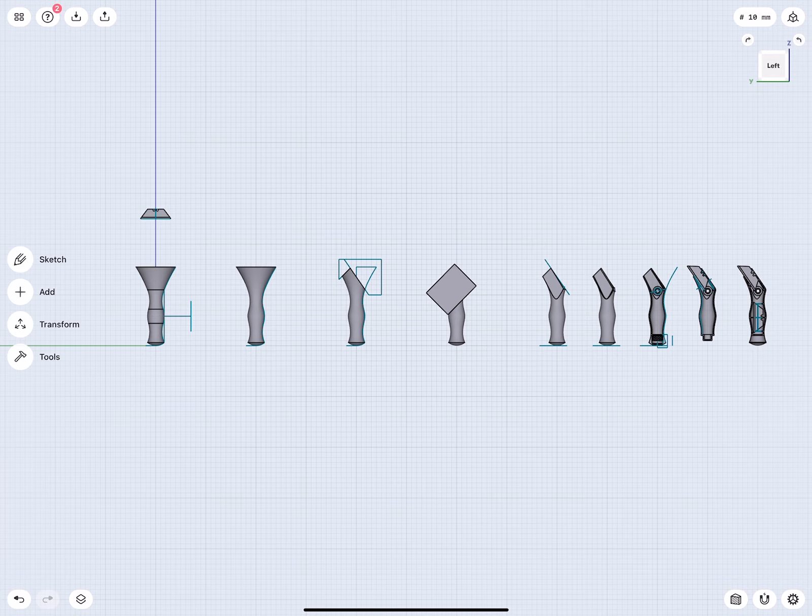In this process lecture, I will show you all the individual steps I took, starting with exploring the initial form and how to sketch it, and then modeling outer and interior details to produce a functional utility knife ready for testing and manufacturing. Please feel free to download the shared file so you can follow this demonstration better and explore the design on your own. Great. Now let's get started.

Very good. So here we are. Let's take a look at what we have. On the left side, you see there are 1, 2, 3, and 4 models. And these are actually representing the initial exploration of the basic form. And then on the right side, we have 5 individual steps.

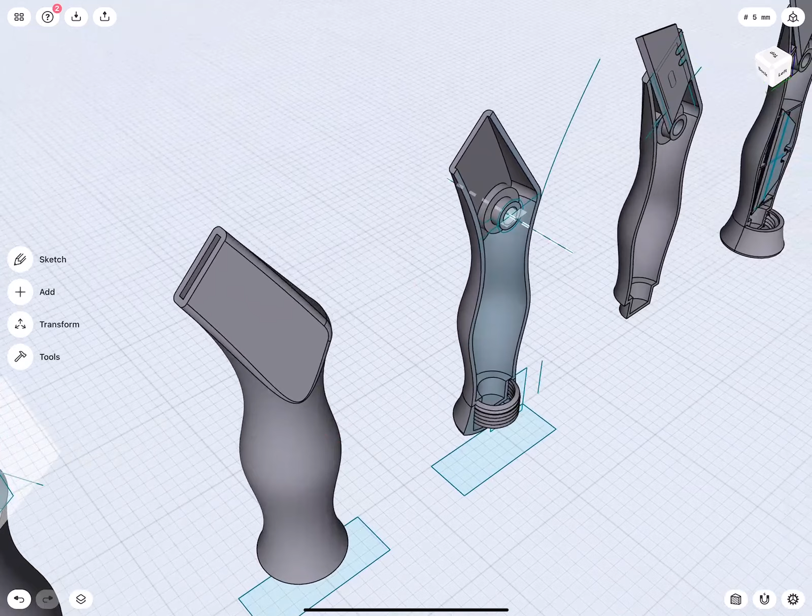For example, there I start shaping the details more, then starting to core it out, add, for example, threading and a hinge. Then I am planning on adding the blade. And then in the end, I will also have all the elements to hold the blade and the blades inside in the handle. So let's take a look at how I started first.

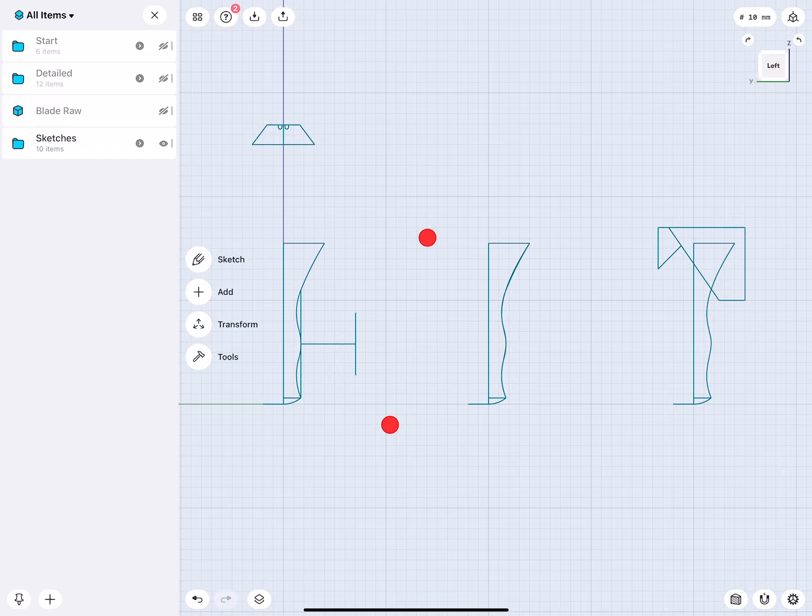The whole design, in addition, is also sorted into the start and the detailed models. There is a blade object, and here inside this folder are all the sketches. So let's turn all this off, and let's take a look at the sketch.

This exercise is based on a very old utility knife. It's metal cast, it's very organic, and it surprisingly works really well. The way it is in your hand is nice and comfortable. You can work with this for a long time without getting fatigue in your hand.

Because it is nice and organic, I assumed, well, we can quickly retrace this out of arcs. So this is what I tried to do here. There you can see I put in all the arcs, but I quickly noticed that while it is possible to create a sketch with this flow, it is also somewhat labor intensive. And I always try to make sketches as simplistic as possible, simply to allow me to work faster and have less work.

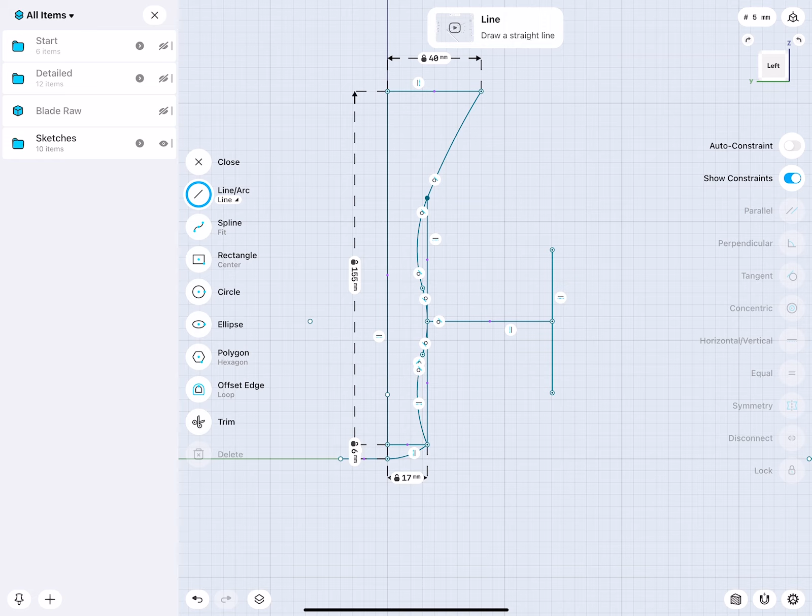What I also noticed based on the sketch, when I created a revolve object, I started to have these edges actually on the surface, which I didn't really want. Plus, because this is an arc, this area was a little bit too, let's say, linear. While it is rounded, it's just not round enough.

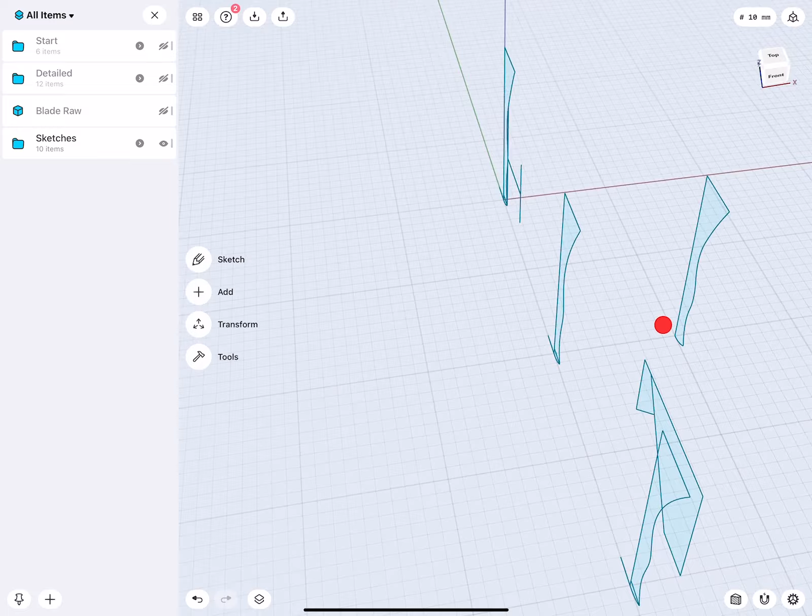So to improve this, what I did, let me go into 3D view. I took the sketch and then made a copy of it and moved it there, into the background. So when I then went back to the left view, I could very easily start tracing over it. So here is a new sketch. 1, 2, 3, 4, 5 points. I'm using the fit point spline.

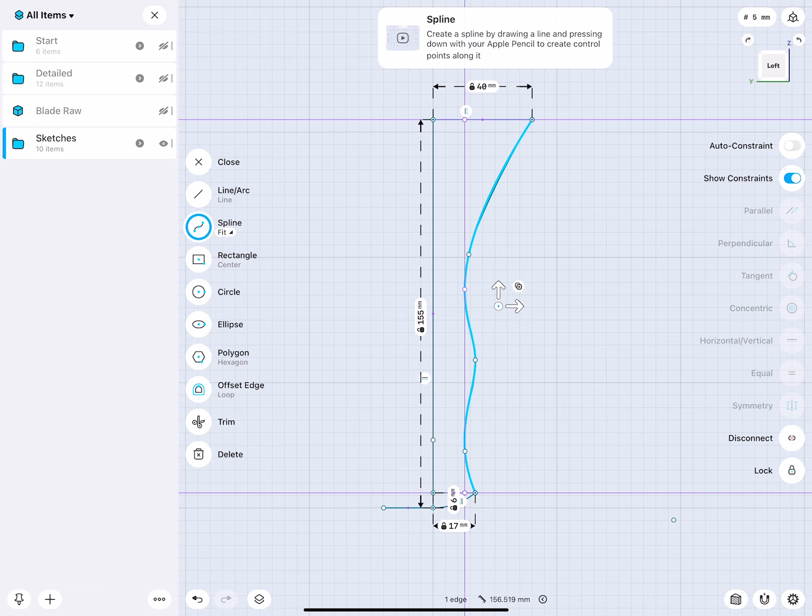The nice thing about the fit point spline is that it creates very smooth and fluid shapes. You can also see here how, for example, the fit point spline is a little bit more bent. Ideally, that is what I wanted. The trick of the fit point spline is we need to figure out where we have to position all these points to get exactly the type of flow we're looking for. But this was only a matter of pulling these points.

And then when we take a look at this shape, which I then revolved, there you can see, compared to the circle one, this is nice and smooth. Okay, so this was kind of like step 1.

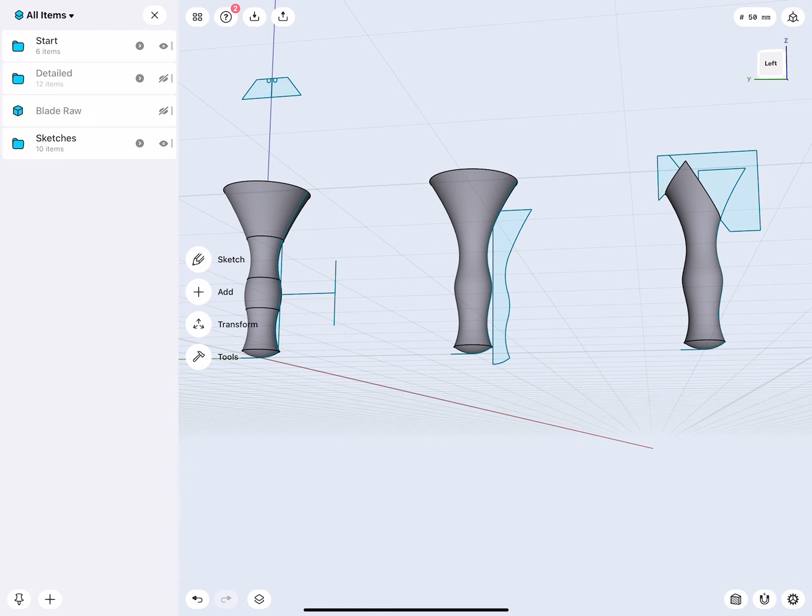This is also a process I very often teach my students in industrial design. When you learn CAD, try to think about how we would do something in a model making shop. So we could take foam and put this on a lathe. And then later we take a knife and start cutting more elements away from it. So that is actually the step that's happening here.

So this is the initial sketch here again. And I drew a line there and added more lines to it, so I could create these 2 or 3 fill areas. And those I used to actually trim everything.

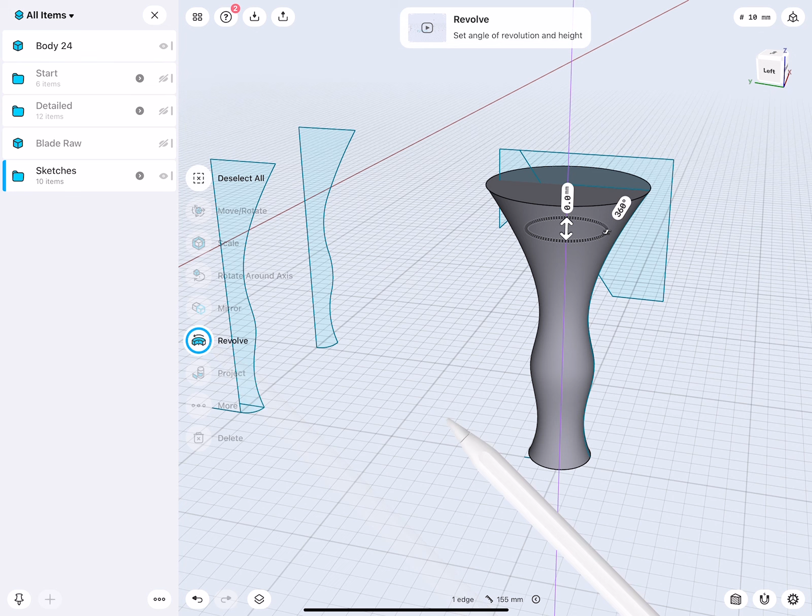So for example, for those who are not familiar with it, I'm just quickly rebuilding this there. And there we are. This is all selected. And then we can cut this away.

Cut this away that way. And then this we delete. And there we are. Super easy, no? Nice. Okay. So this was actually from the side.

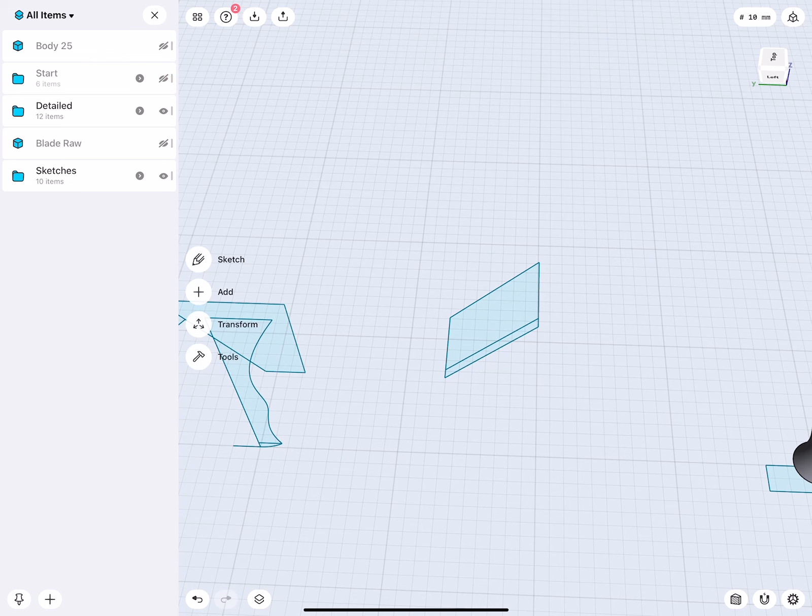But when we take a look at here, you also see that we have these sides being cut. So this is actually not just something that's cut down from the top or strictly from the side. As you can see here, this is a cube where one side, meaning this face, is actually rotated. So how did I do this? Also here, very simple. And also Shapr's direct modeling tools are really fantastic for it.

So I brought this over 200 millimeters. I actually moved all those in 200 millimeter steps. What I show you here is modeled in steps. This is also how I internally work when I explore variations. It's actually just easier to spread something out. And then it's kind of like a manufacturing street where we do particular tasks. So as you saw, I can always make a new copy, bring it to here, and then redo something.

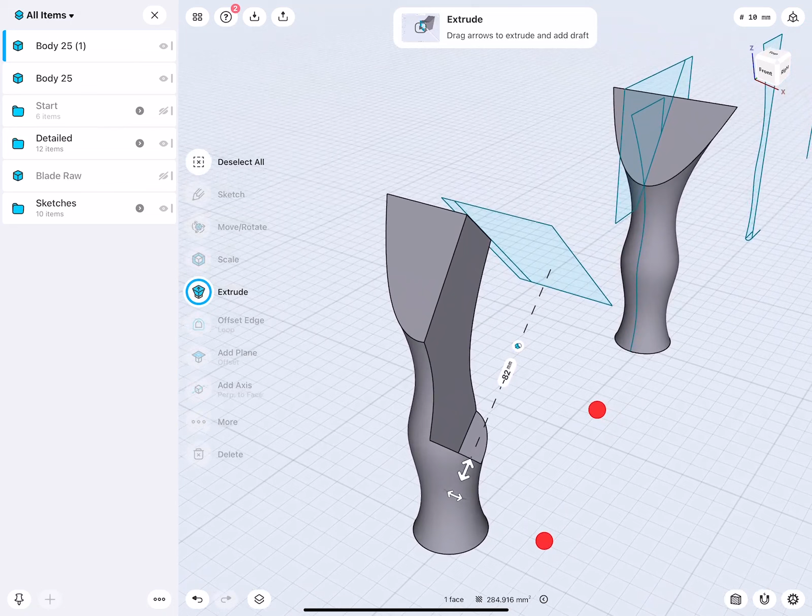So this shape, I actually extrude a little bit, and you see how it cuts into the body there. That's not good. Let's make a new body. Now, this face is the problem. We have to rotate it, and this is super easy. So select the face, then the widget we move to there, and let's rotate it.

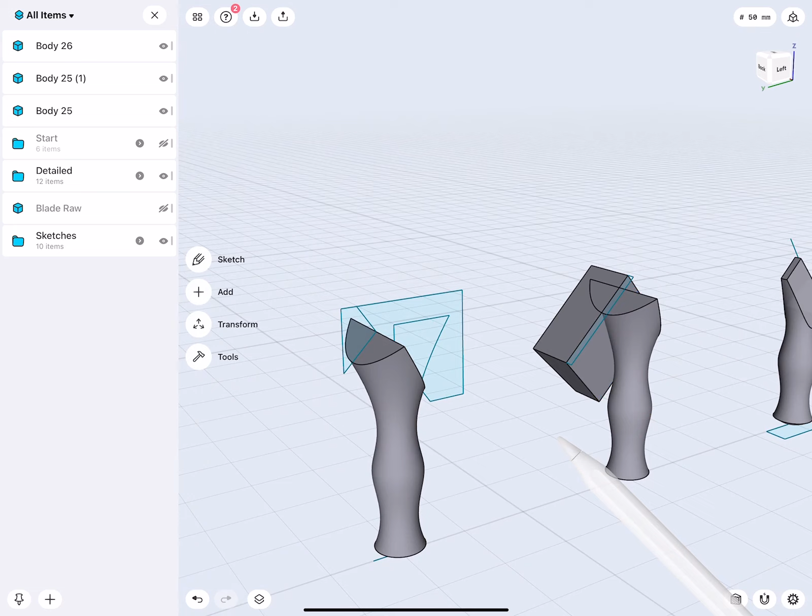Now what we need to pay attention to is how well this actually intersects. Is this good? 13, 11. Yeah, this is good. Very nice. So one part is done. I can make a copy by simply mirroring this over. I use here a sketch. And there we are. And then from this, these two I will subtract. Very good. And there. See, super easy.

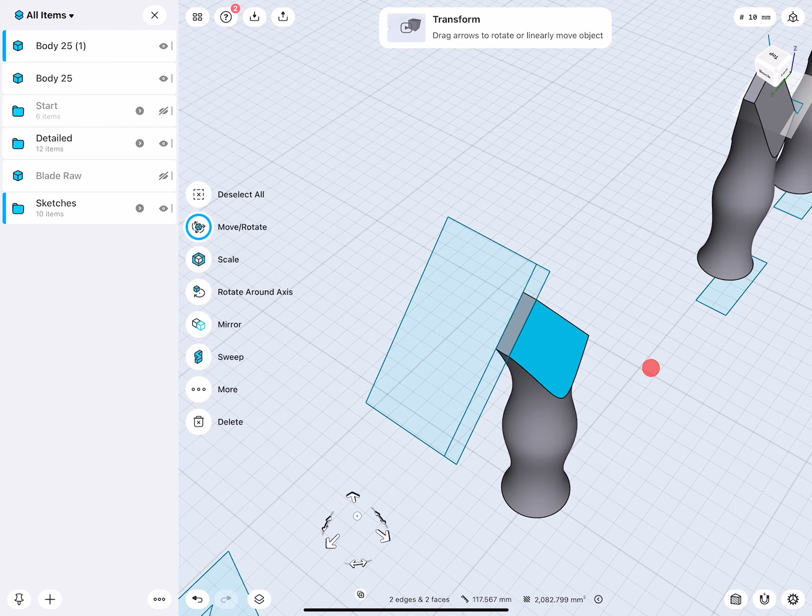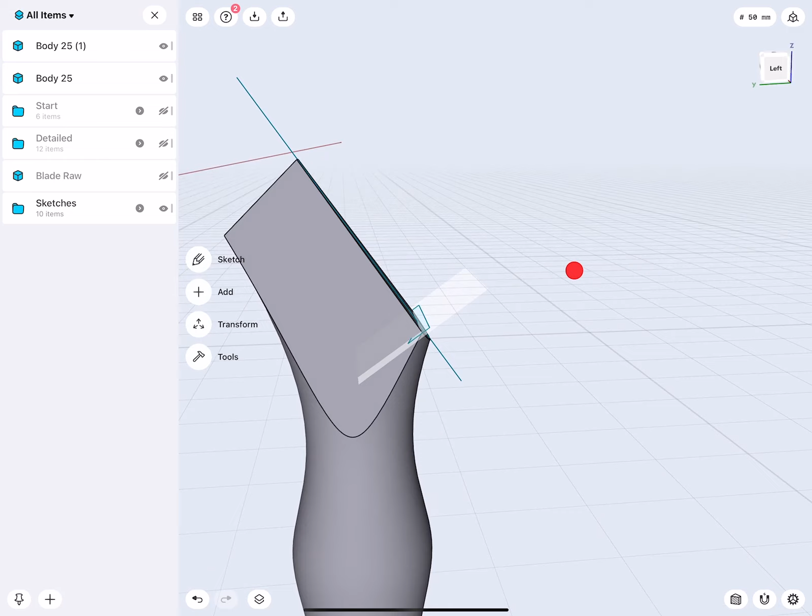Okay. So based on how I sculpted this object and based on how these lines are drawn, I can then create all these angled faces. Very good. Everything is nice and round, and the top surface here I would like to be round too. So the way I did that was that this I brought over. And you can see here there is a line. The line is actually a copy of the sketch.

I brought this one over, and directly onto this line I would like to add a sketch that is kind of running along, so perpendicular to it, and use a construction plane. So we don't want to just draw a sketch and then simply try to rotate it into position. We do it differently. So we go to add construction plane. And then here we have various options: through edge, at an angle, perpendicular to curve, perpendicular to edge.

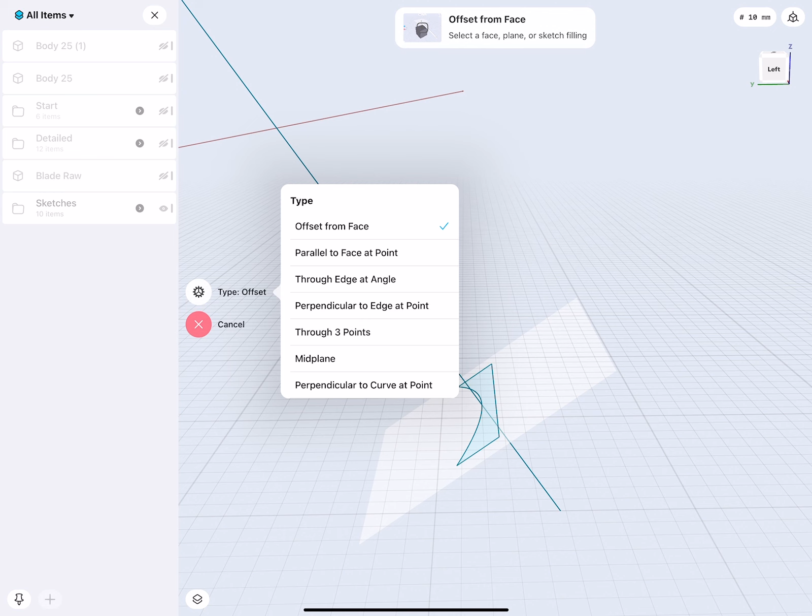There. And then we can drag this to where we want. And you see how this is actually at an angle. When I select this plane with a finger double tap, and then quickly draw something, we can see how this is now perpendicular to this line. So that is the way I created this. Very good.

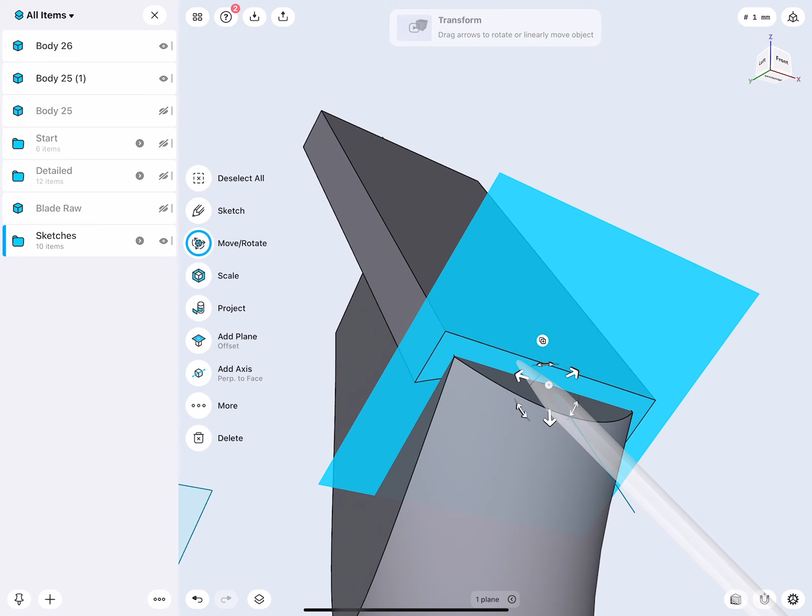So this shape, then I can make this new, and might have to hide this, push this back. And this arc is now going to give a shape to the top part. So from this, I would like to remove this. And there we are. Super nice. Okay.

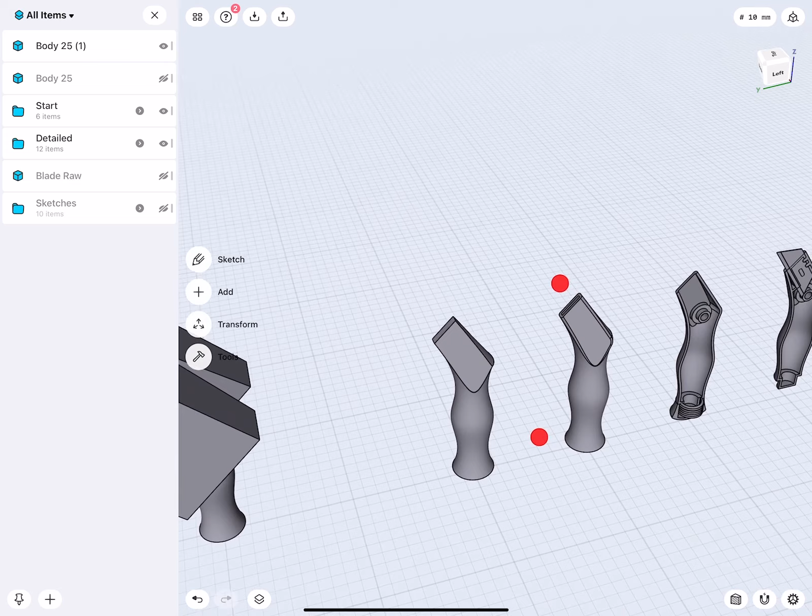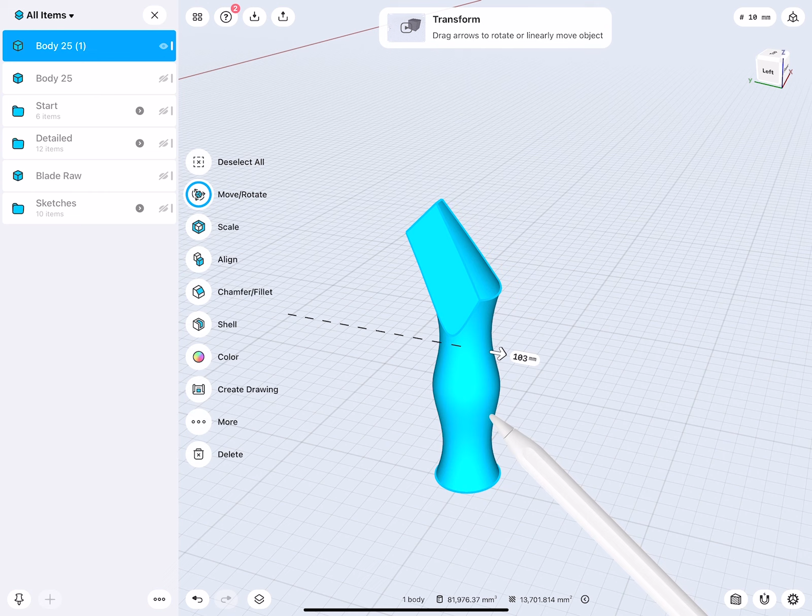At this point now, we're actually making a transition from exploring the basic shape into the more refined details. In this step here, you can see I have the corners rounded. I also have a material thickness, and it's hollowed out. This task of giving a wall thickness is something you want to do after we rounded the outside. So this one here, let's move over. I think in this case it was 103. Yep, correct.

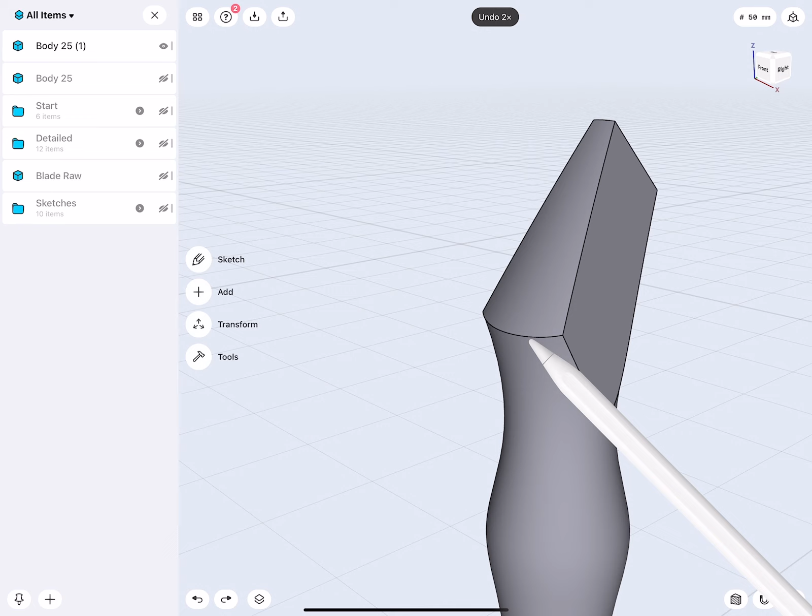Here we have various edges. We can select them all at the same time and then round. And you see how I get this triangular edge. Or I pre-round one edge, this one, and then select those edges and round them. You see how I'm getting a much nicer flow. And while your hand sits on this surface, this is something your thumb could actually rest on. It's nice and comfortable. Okay.

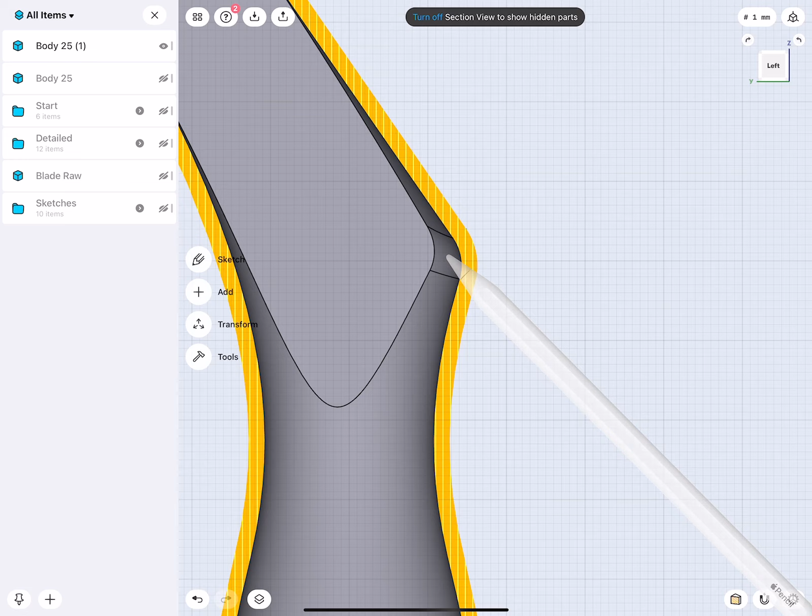Now, because this edge is rounded, if I select this face and then go to shell, 2 millimeters, and go to left and turn on the section view, you see how you also end up with a nice rounded interior edge. Very good. See, it's actually that easy. It's not really complicated. And because this is going to be a symmetrical object, I also have here a square at the bottom, and I just extrude this up and create myself half of an object. Very good. Okay.

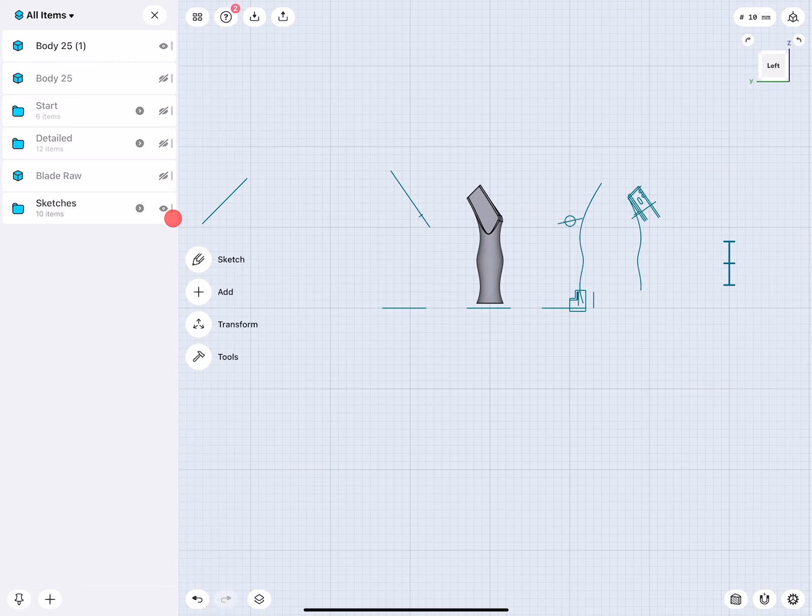Now let me go back. Okay. I will go back one time. I made a tiny mistake. I forgot actually the rounded corner at the bottom. That's actually no problem. We have this here. So revolve. Very good.

And now this we bring over. Again, you see how it perfectly snaps in. One of the main reasons why you want to work with the grid. I made kind of like a mistake, but it wasn't really a problem to clean this up. So maybe it was good I made this mistake. Showed you how good direct modeling is.

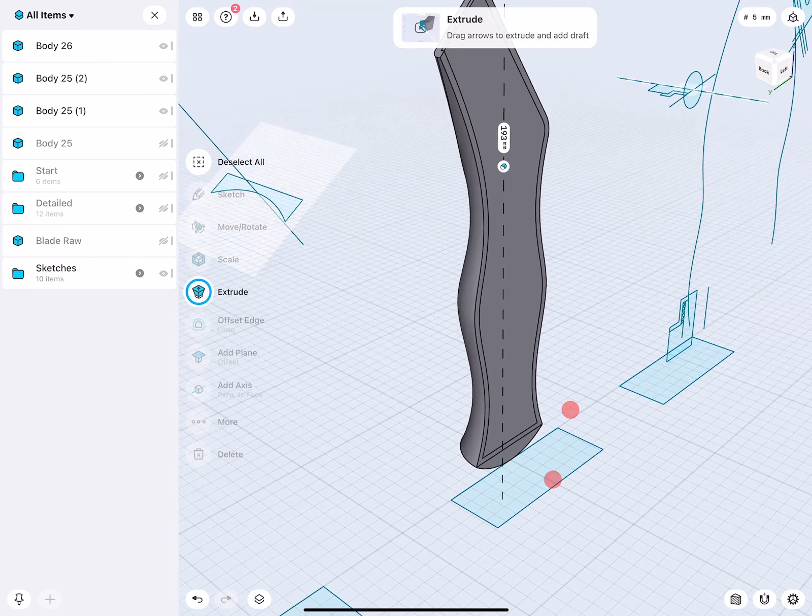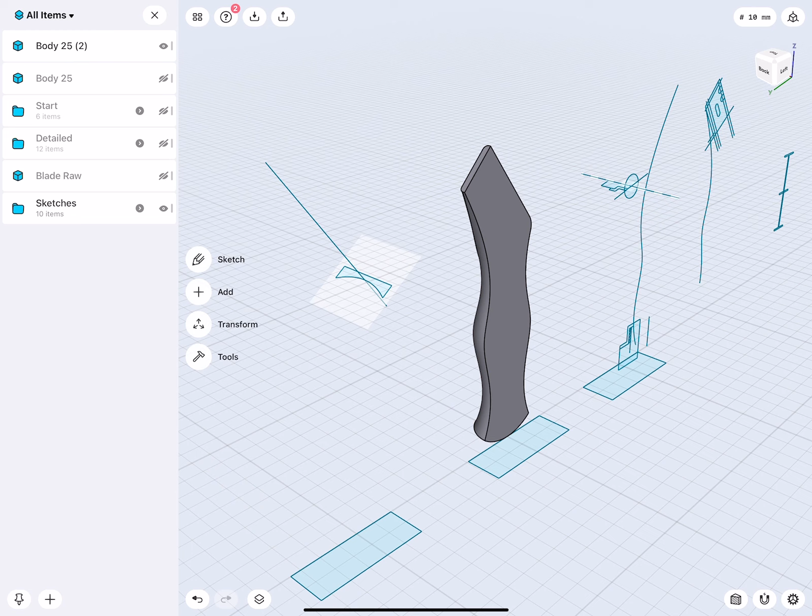Okay, so there seems to be another object there. So let's see. This is 1, 2, and 3. These were the old parts. Okay, very good. So, and then this here, 2 millimeters. Very nice. Okay. Fantastic.

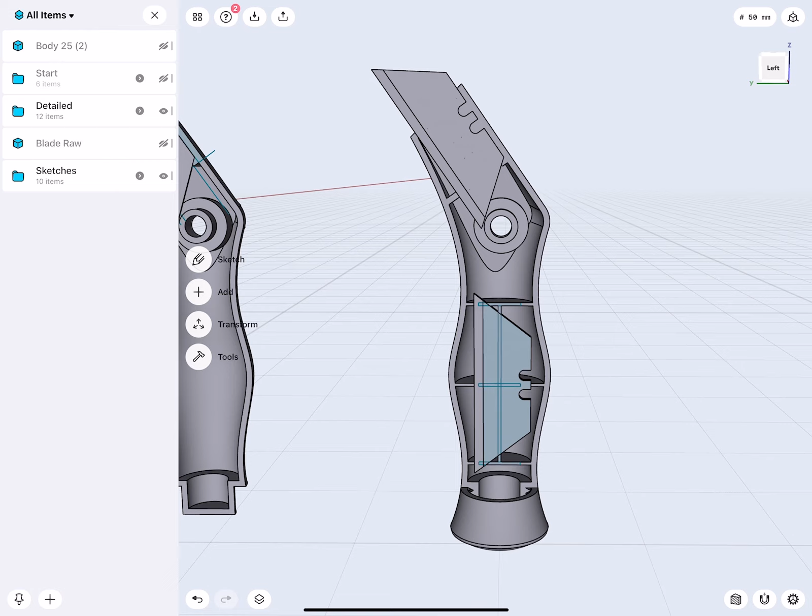The whole process of designing, sometimes people are scared away by the complexity. It's actually not really that complicated when you take the amount of details here and think about each detail as a small problem. And we have to figure out when ideally do we work on a sub-problem. It's kind of like a house of cards. We put one card to the next, to the next, to the next, and then later have a construction. So that's the same way how you want to approach 3D modeling too. It's very logical.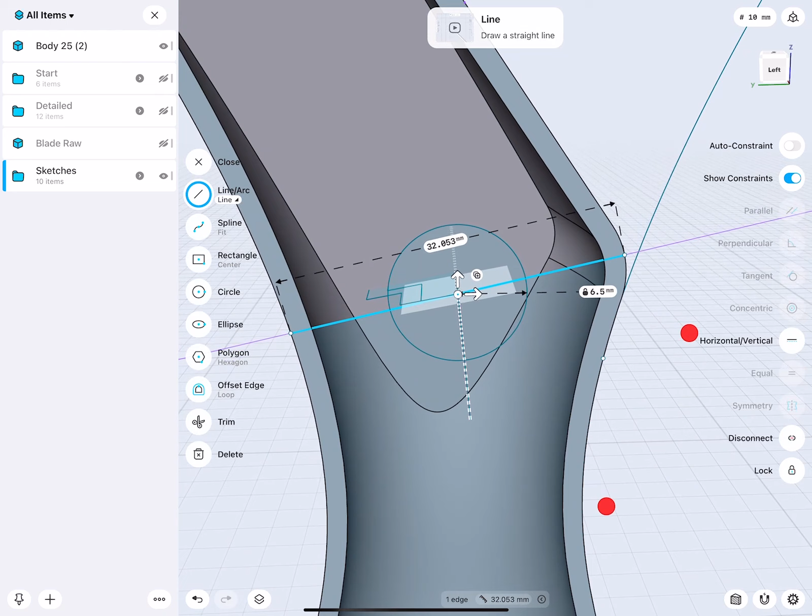The next step after we did this shelling is maybe to think about, when we have two sides that can rotate, where is the axis going to be? So this whole part, let's move over. And let's take a look at what I have there first. Here's a line. I drew this line from the side, so I can figure out actually where is the center. And then at the center, I created this circle.

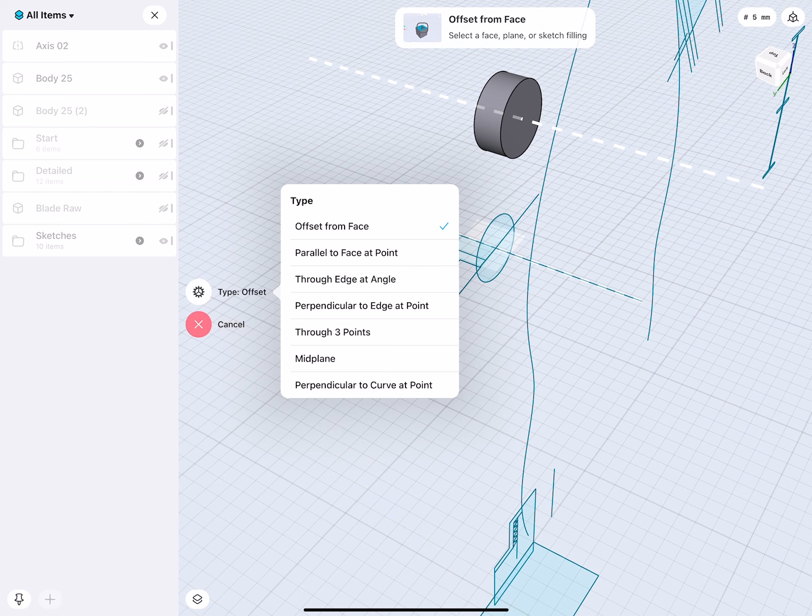Now this circle was very useful because when you create a circle, I'm going to move this circle to somewhere else, and you select the outer face, then we can create an axis through it. And along the axis, we can create a plane. So currently here we don't see it. So what you want to do is add a construction plane. And then here we say through edge at an angle. That is the correct one. It doesn't really matter the orientation. There we are. Very good.

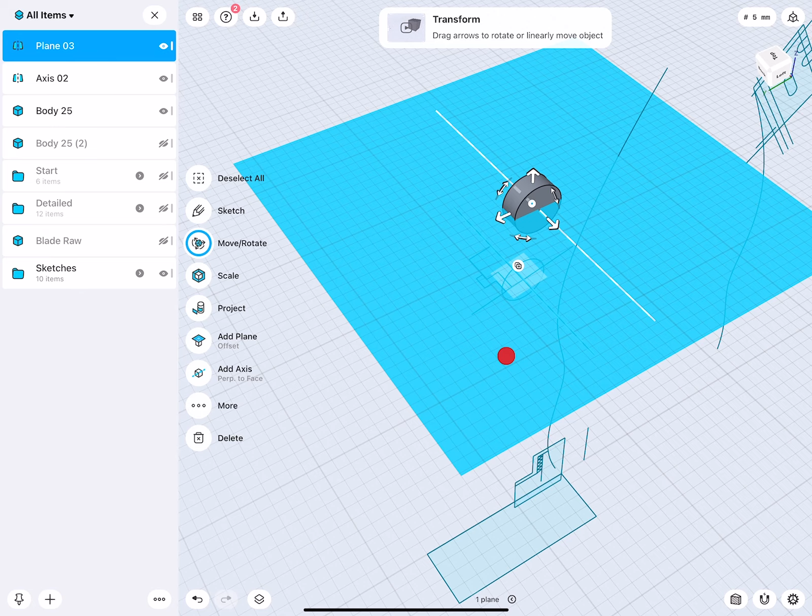And then on this plane, with your finger, if you double tap, we can start drawing more elements. And you see how this then snaps actually or projects the axis into the sketch as a line. So let me delete all those and this, because this is basically how I created these two shapes. I wanted them to perfectly rotate and stay inside this circle. That's also why I have this axis on the sketch. That's my revolve axis.

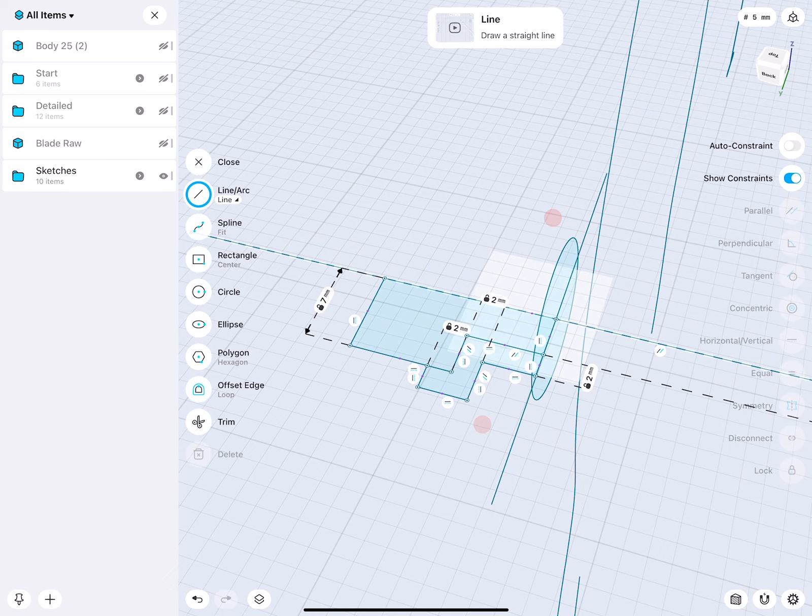So what are actually these two elements? So the inner one, I will revolve around this part, and then from this, I will remove this one. There. So this actually created an opening. And then this, around this line, I will revolve. Very nice. And this I can try to move forward a little bit. And we see how it sticks through.

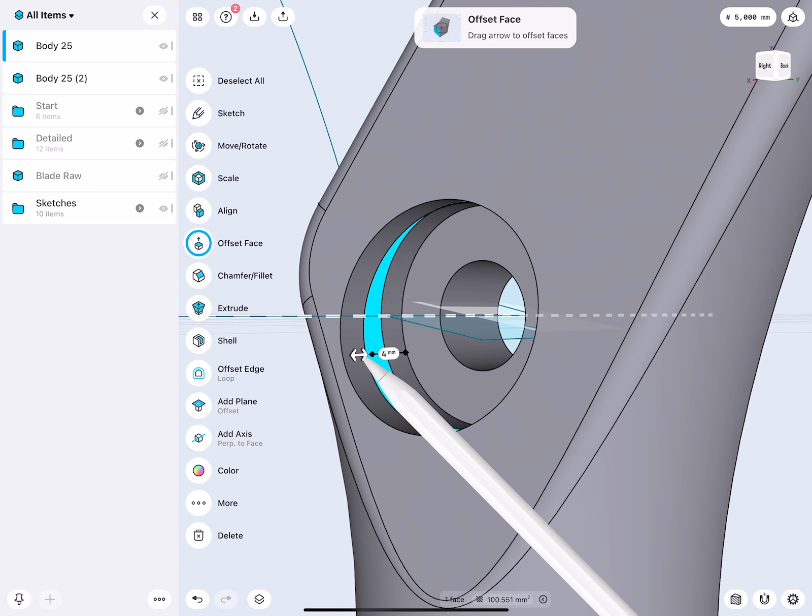So these two I will join via union. Very good. And then there's kind of like this opening. That's not good. Welcome to direct modeling in Shapr. We simply move this face and close that opening. Done. Beautiful.

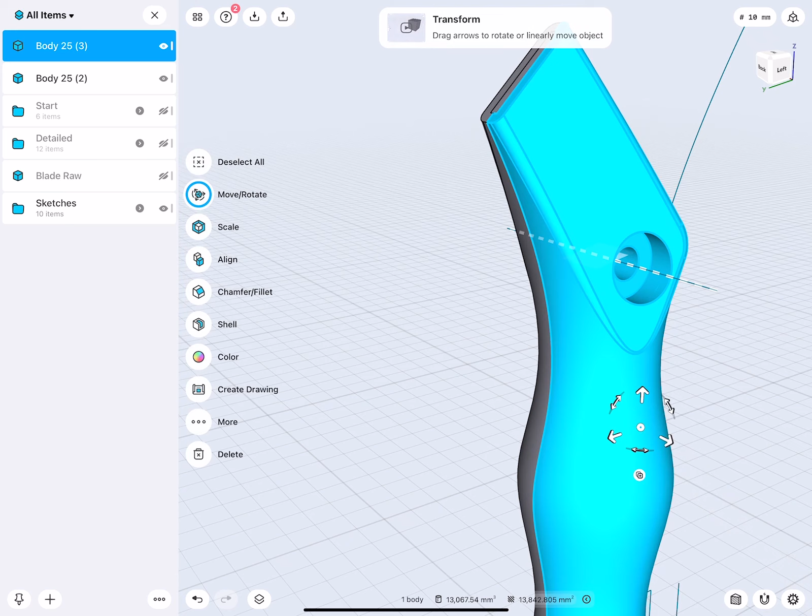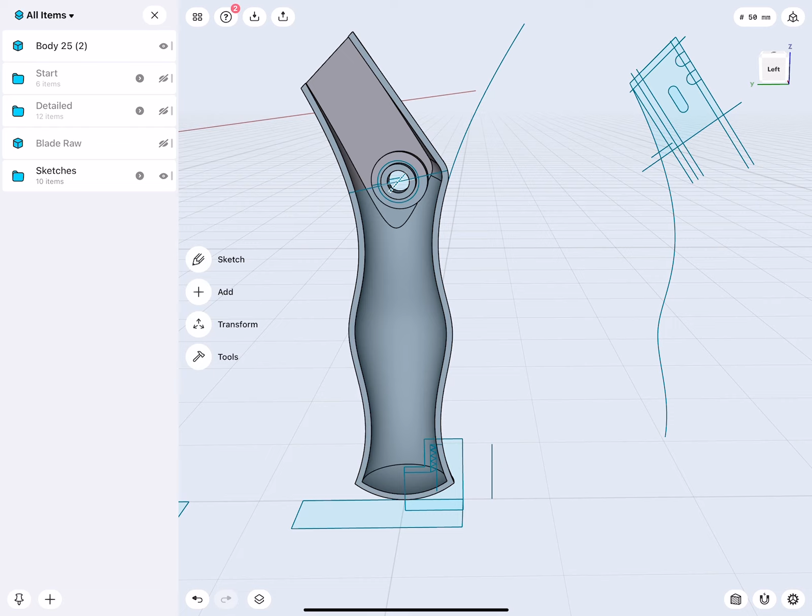Now we can do a very quick test. So if we select this and mirror it along this face, there is this part. Very nice. This is good. And this one, if I move my 3D widget to there, there might be some sort of a hinge inside. Okay, there we can rotate it. Very good. Okay. Prototyping 101. So the axis kind of like we figured out. I also previously put a blade there, so I understand where roughly this axis only can be, so it's not actually intersecting with the blade.

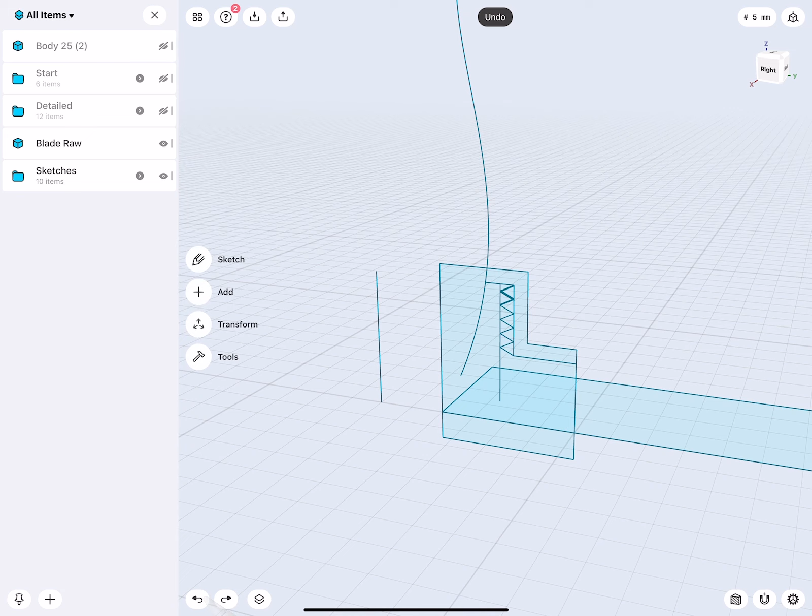And let's take a look at the bottom here. So there we actually have all those details. So the bottom element, I actually split one time. Let me show you how I did this. So I do move forward and backwards to make a copy. Now I have to move this back -1. Very good. And then I will hide this one.

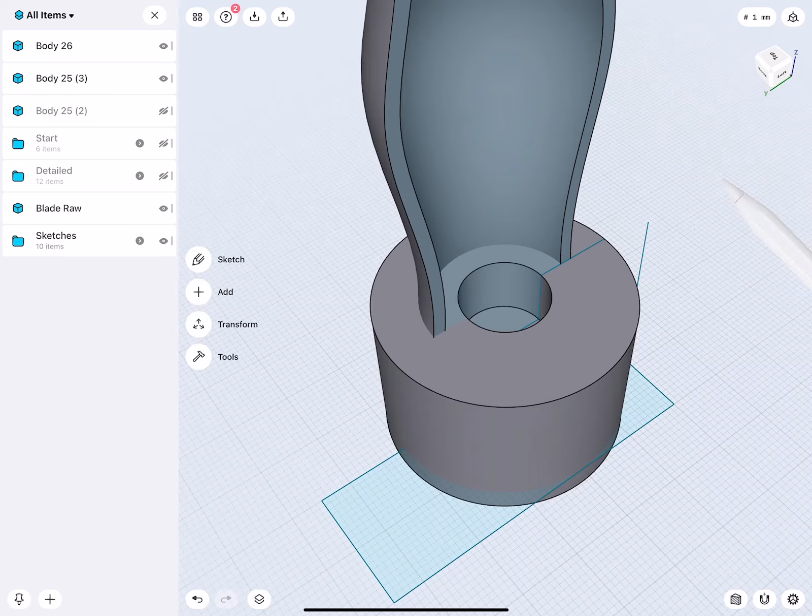Down here, I have quite a lot of sketch elements. I think this should probably do it. Very good. Yep. And I will revolve this. Very good. So from this, I will remove this. Keep the modified body. Okay.

Let's remove this. There we are. Pretty cool. So you see that actually this way I sliced this one. Now I just noticed that there was a little bit of a dirty element left over. Not a big deal. I do a new revolve.

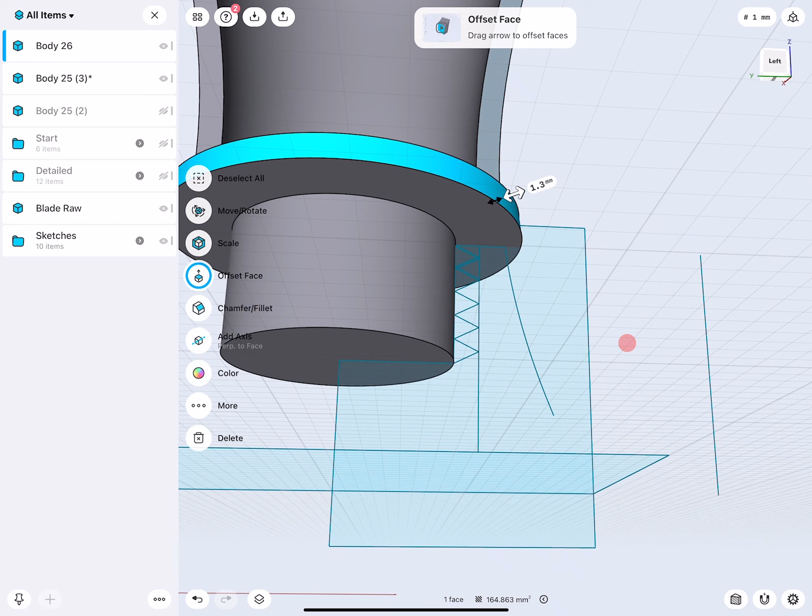Expand this a little bit. Bring this one down. You see it snaps together. Expand this more. Very good. So this I need. This I can hide. This is not wide enough. Very good. So double tap, intersect. There is the bottom part. So that's actually how easy it was to create kind of like a split of these two objects.

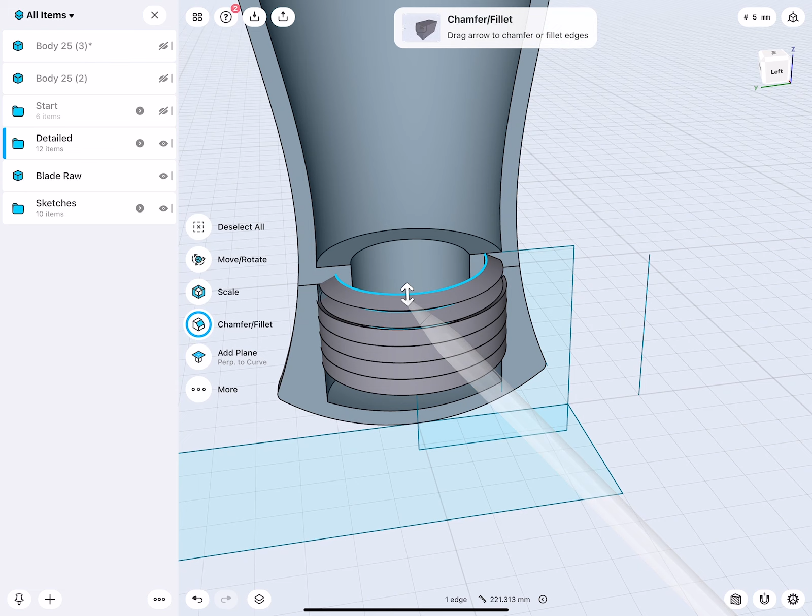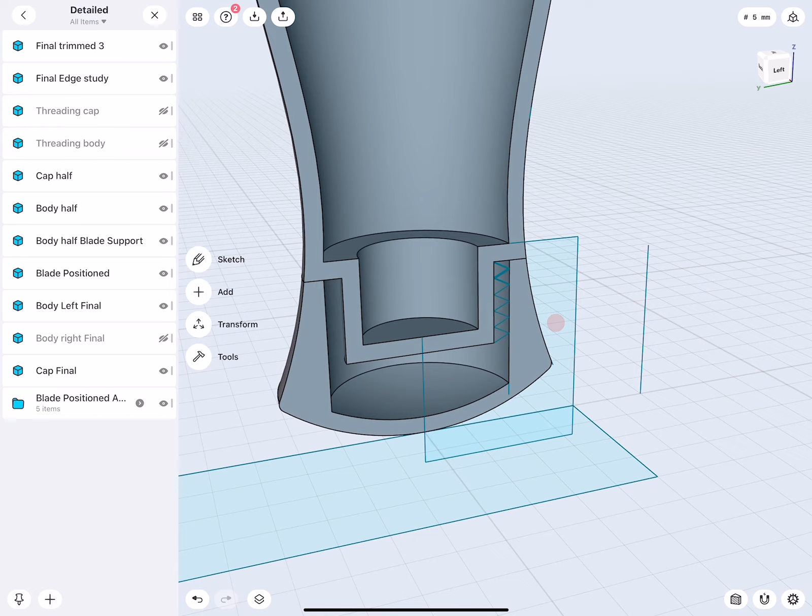Let's take a look at my final design, and I will, give me 1 second, I will hide the threading there because there's actually a little bit more going on. You see, when I select this, I have a new element there. Because this is actually, how could I say that? Something I needed to add because the cap later will be rotated or threaded onto it. So let me show you how I did this.

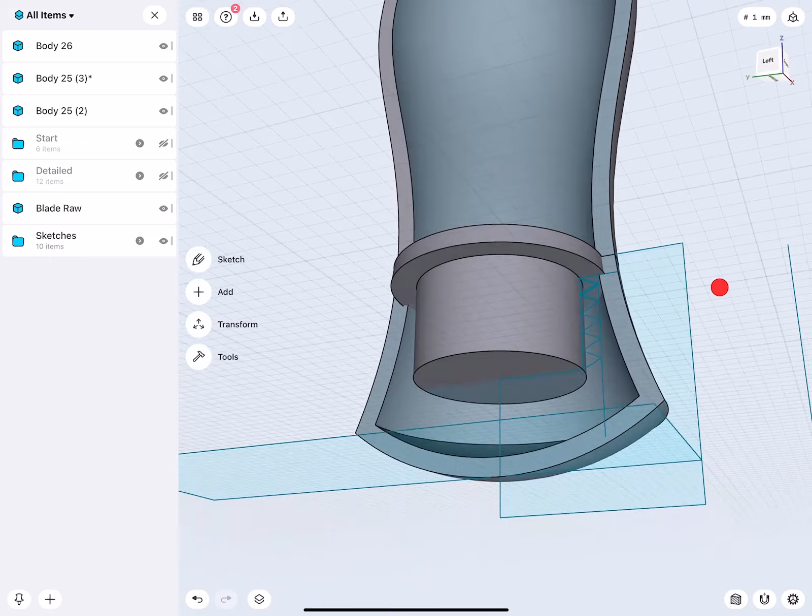Again, this is really, I hope you see how logical all these steps are. To overbuild a little bit, I expand this a tick. Very good. And now I noticed actually that this needs to be to there. Okay. So this I will hide, and then union together because this was revolved 360 degrees. I just remove a little bit. So the other element is a tick longer.

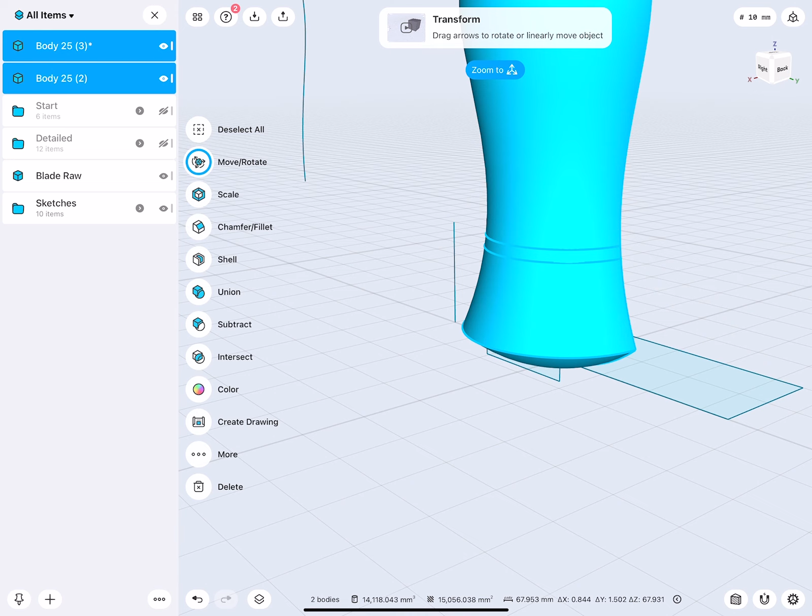So what do we do? That's actually very easy. From this, simply remove this one and keep my tool there. So this was now made shorter. Easy as pie. Pretty cool. Let's go back to details. They also notice, there is a triangular element there. So when I want to add threading later, there's a video about how to make threadings, so I won't go into detail here too much. I need the threading to sit on something.

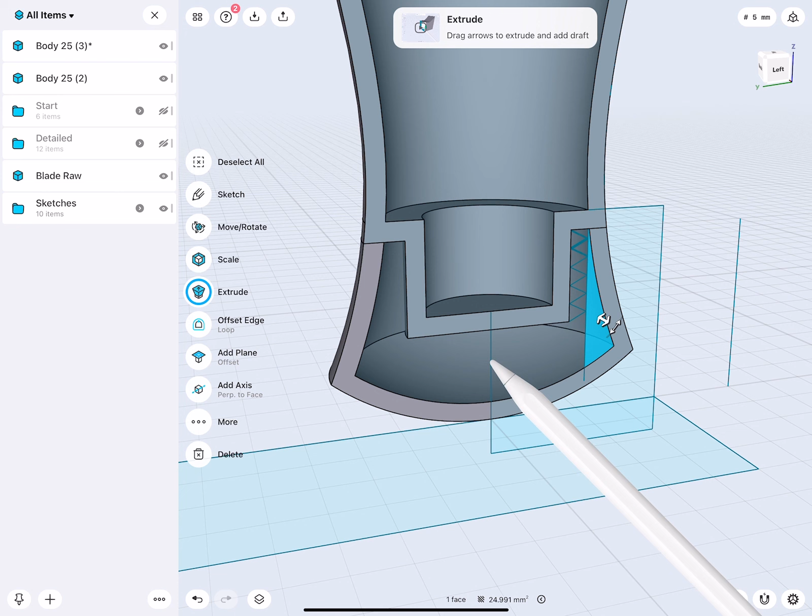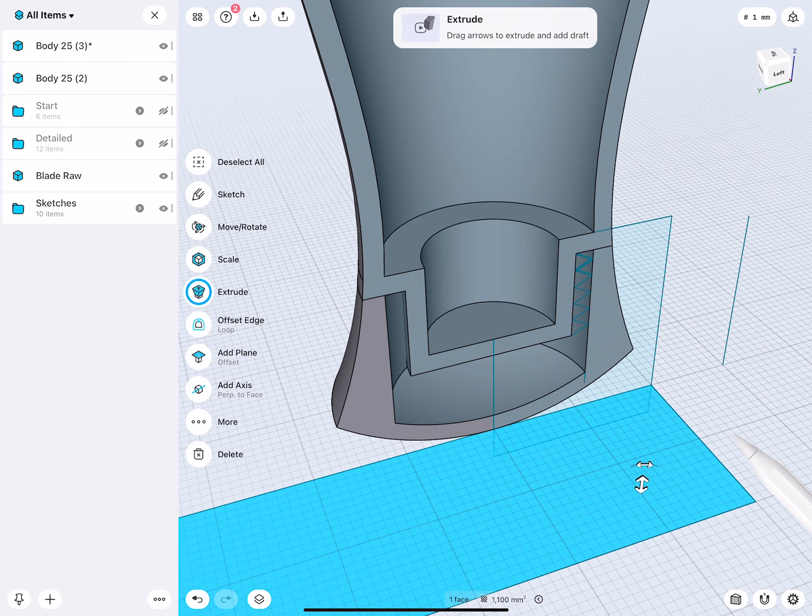So I need to give a little bit more material to here. So let's revolve this. Can actually just revolve 180 that way, and then these two we join, so I don't have to trim from the bottom via extrude. Okay, let's take a look at the detailed part. There we are. And here is a triangle. And there's a triangle. So this is how I started blocking out the threading.

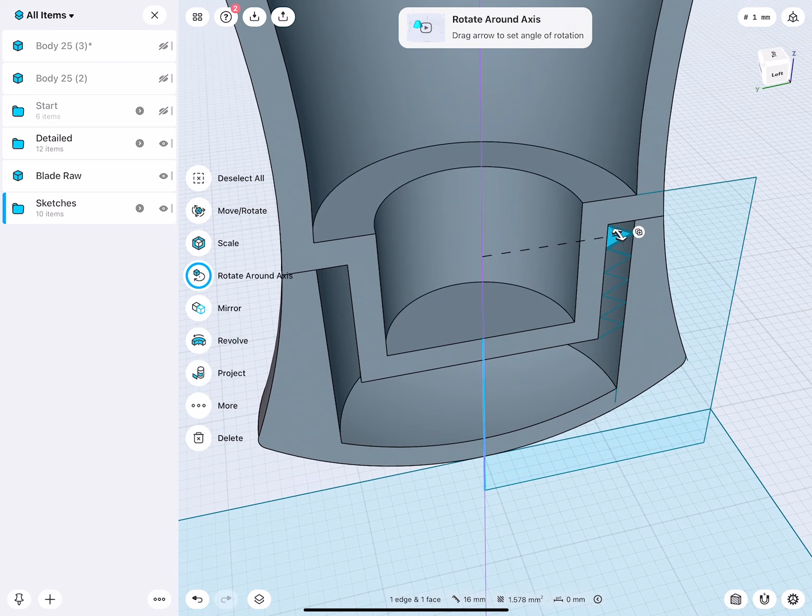But if I do a threading, there's literally no air in between. So I offset actually some of these lines so I can create smaller triangles. So then this triangular profile I select this line, then I go revolve, and then the trick here is that we move this one down. Very good. Okay, 360 multiplied by 2 is 720. Let's move this by 4 millimeters. And you see how easy it is to take 1 turn, 2 turns, 3 turns.

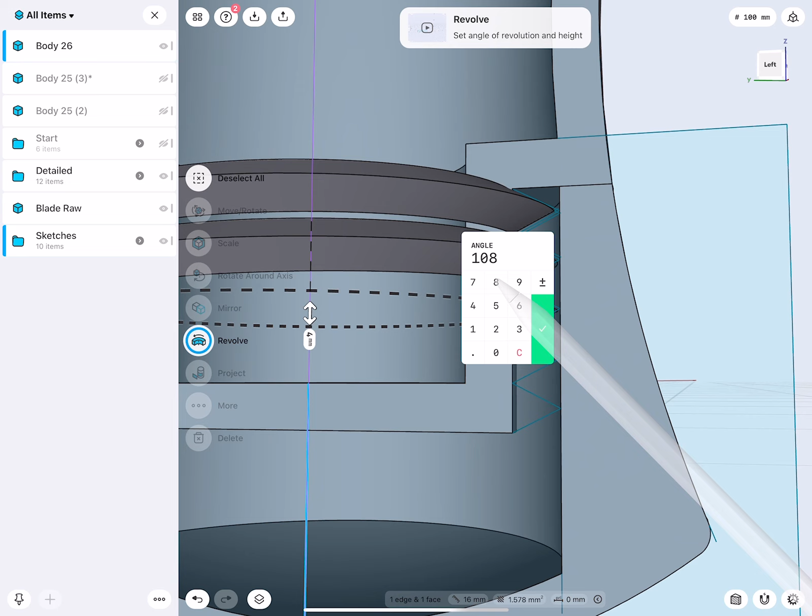So this would be another 360, so 1080. And this has to be then 6 millimeters. Ta-da! Okay, and then we do exactly the same for the outside. So that is the way how I build the threading, and then the inside we can shrink a little bit so it overlaps with this body more, and then we can join those better together. It's called overbuilding. It's a practice I use a lot. So I don't have one face sitting on another face. I have more volumes intersecting with each other.

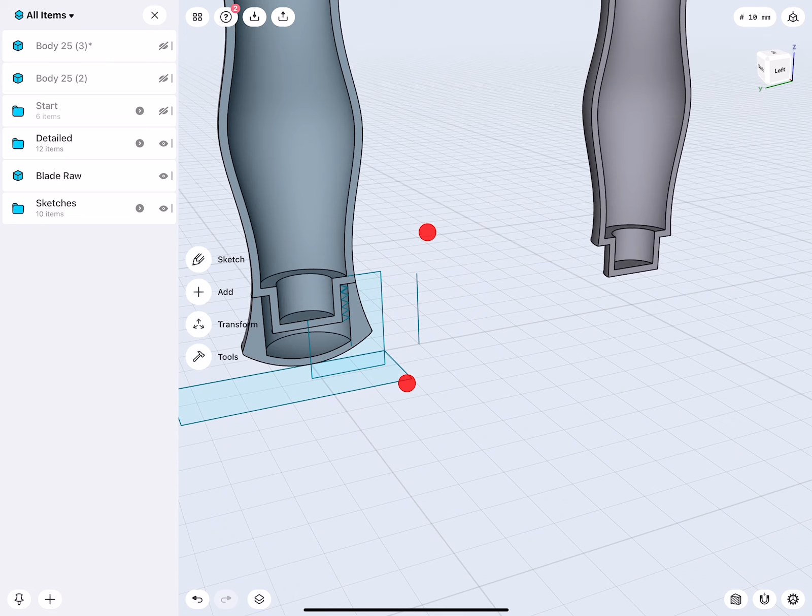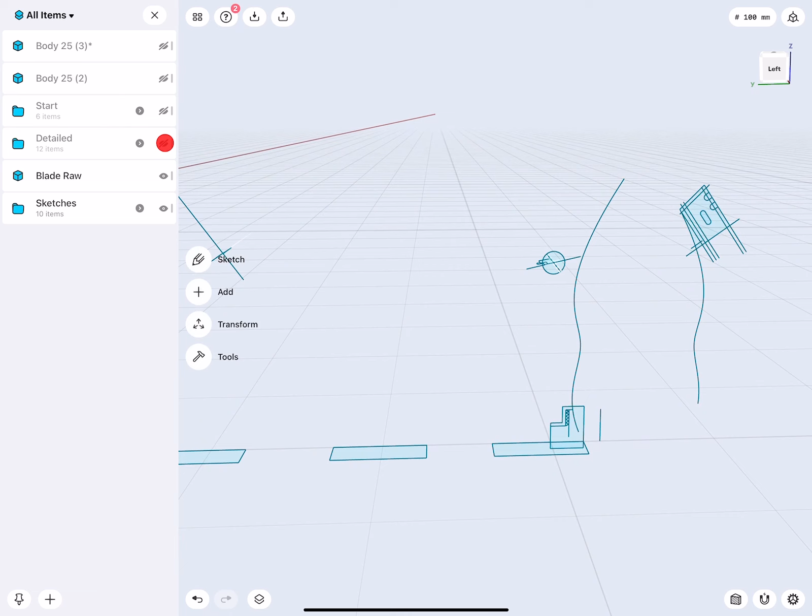Then we kind of like finished the threading. We finished the axis. That is all good. The next step then is, well, the blade. How do we get the blade? Also not complicated. I will actually go back just to this model. And here is my blade. I make a copy. Just move this over. And then rotate it as I would like to. And I lined this one up with the top and bottom edge. And this is basically the way how I brought this into position.

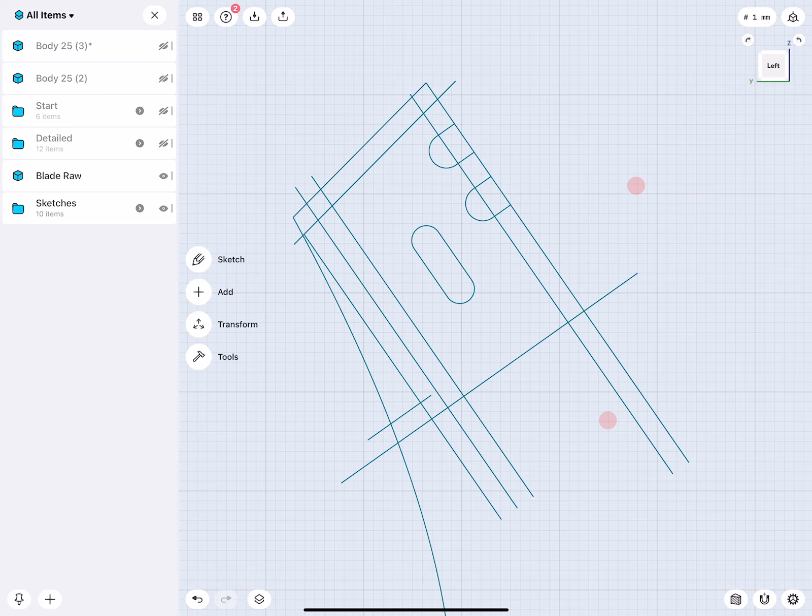Very good. Let me hide this. And then there you see all these projections. These came from the individual elements of the blade. So I projected this into the sketch, and I simply tapped the grid that projected it right onto the sketch. Let's hide those elements. There is this body, and I move this one over, another 100. Very good.

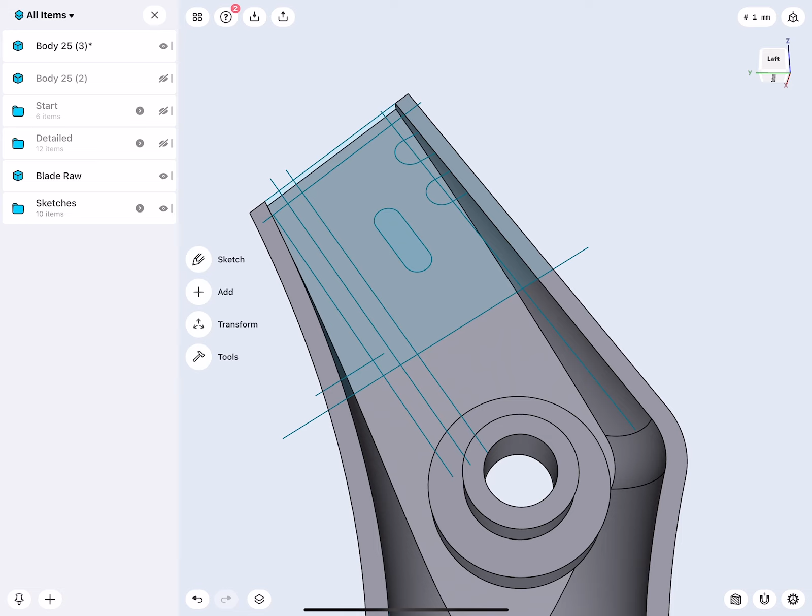So, and now I knew I need to have something that holds the blade nice and secure. So this is why I have these keys here that will go into the female element of the knife. But then so it doesn't wobble, it also needs further support. So for example, this is a little support surface, which I can extrude. Very good. And if I go further, it starts cutting in. I would like this to join.

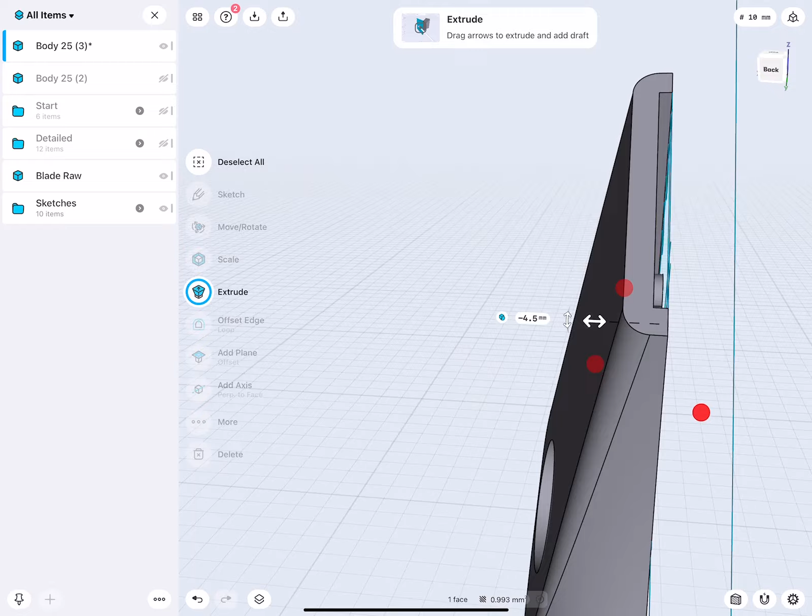There we are. I can push this further through. That's good. Yeah, I have to be careful that it does not actually get through. And yeah, I have a continuous edge. So this is perfect. I could also select this and union, for example. Very good.

Select then this face, and hopefully this will work by dragging it down. It did. Beautiful. You see, so easy. It's amazing actually how direct modeling here works.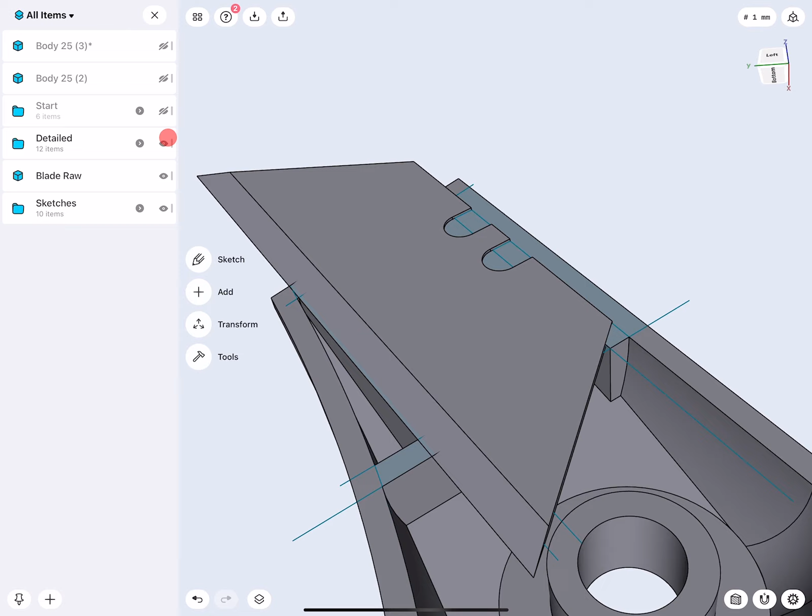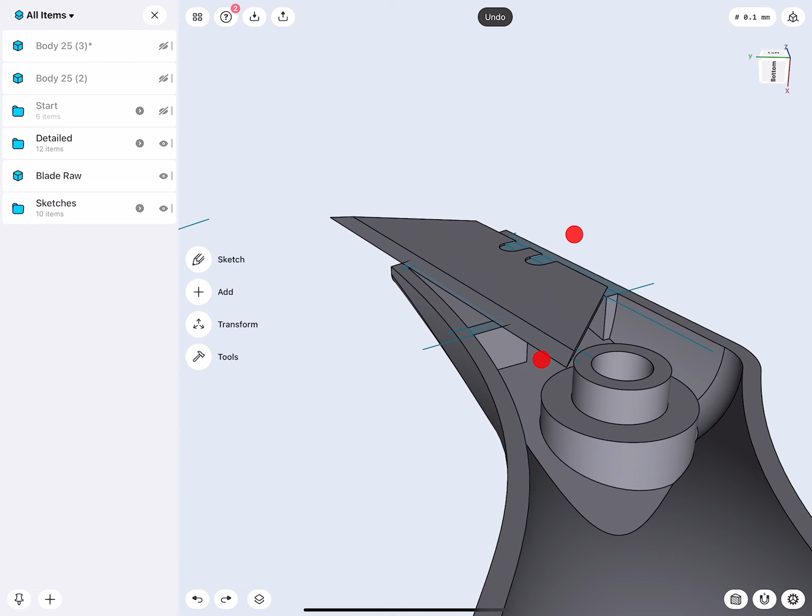Okay, so let's take a look at all the elements here. So there you see basically how I added more material to the original object, so it has more material later I could work with to hold the knife. So now here's actually something I realized only afterwards.

So when I have this object and I make a mirror there, very good. And then I would like this to simply rotate. The blade actually has to be not in, but under here. So two solutions to this.

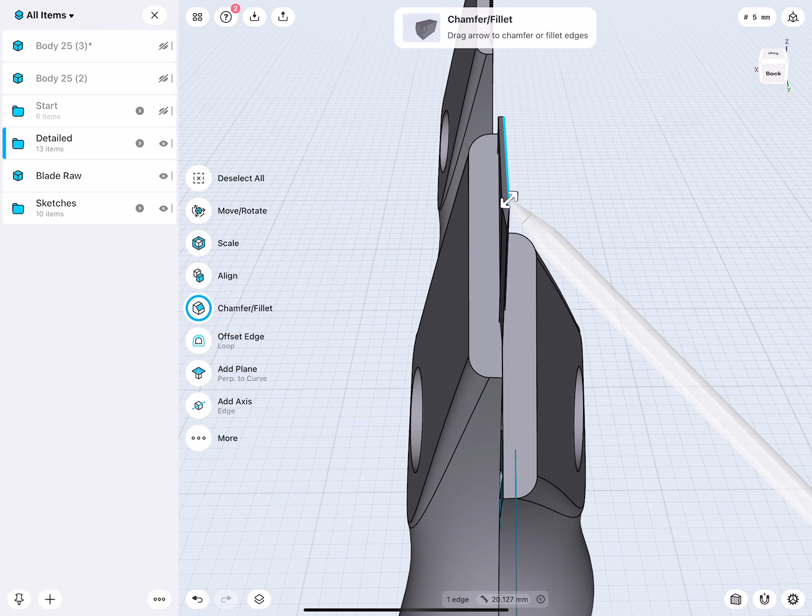Either this side is thicker and this side is thinner, or I simply take the blade and move it 0.25 millimeter to the left. This is actually 0.5 millimeter thick, so not even 0.5 millimeter, just 1/4 millimeter. So let me show you what I'm talking about.

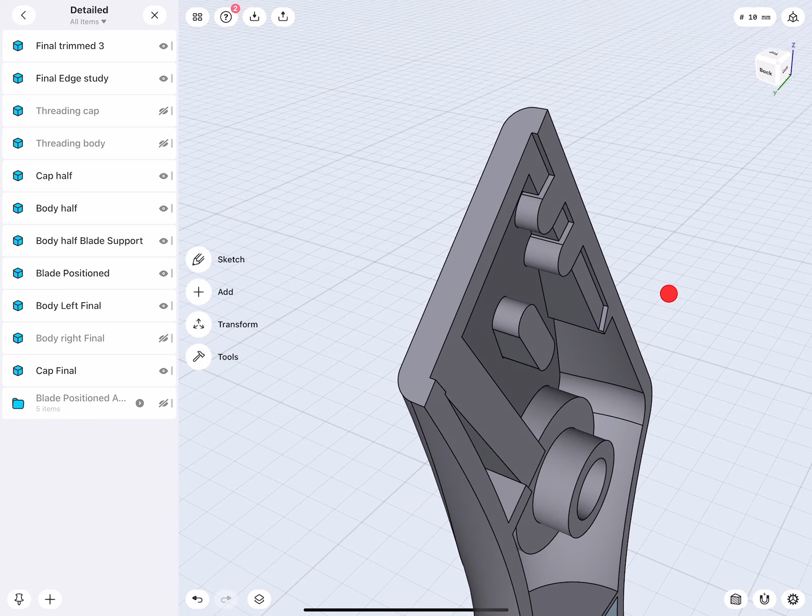So this we delete, and then this I would move over 0.25. So you see how it's nice and flush. And now I could actually select the blade and remove it. That's what I did there. You see how it created the cavity for the blade to go right into it.

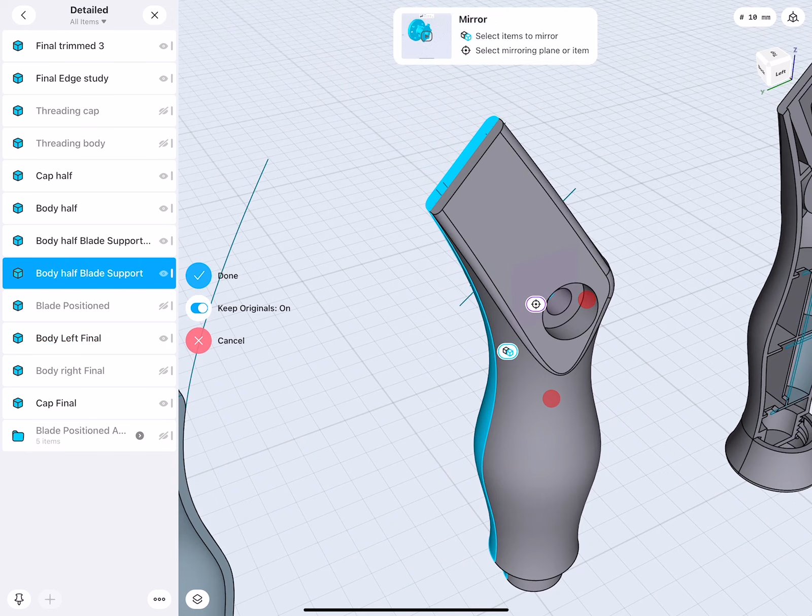Okay. Because when I select this and put it on the other side, or essentially before I removed the knife, so this means this one here, I will make a copy to there. So you can see the steps I would use. Very good. Move this over 100 there.

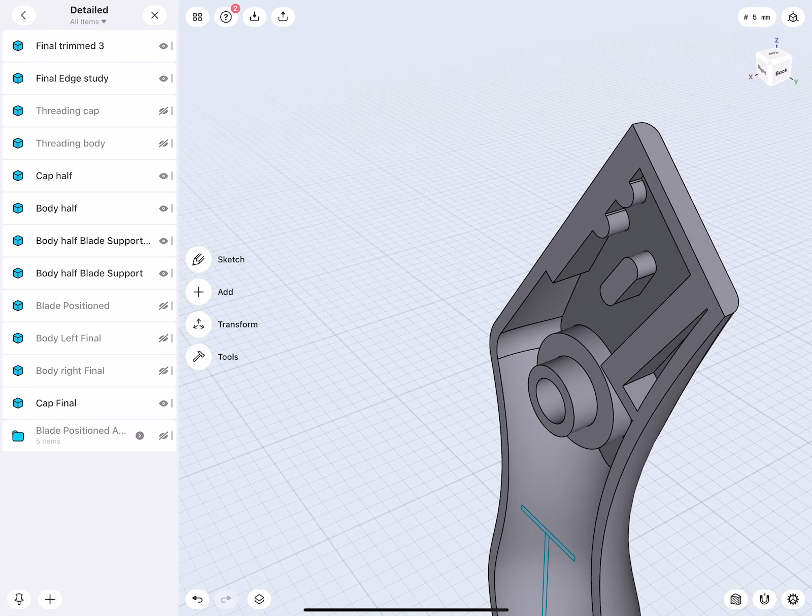So there you can see how there's actually no material removed because this slides over the blade. And here the material is removed because this is where the blade has to sit in. And this 1/4 millimeter to the left or to the right really does not matter.

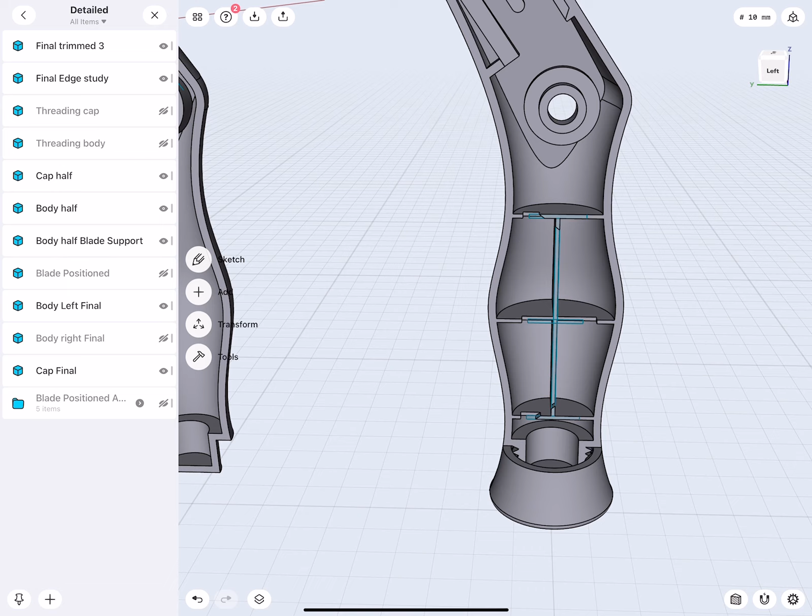Okay, very good. So last step really to do, besides adding the threading to the cap and the parts, is then also thicken this area, and then we can create a cavity or a holding mechanism to put multiple blades in. The nice thing of this design is this cap we just screw off, and then you can rotate the two parts off, take a blade, put it in, close the two parts, put the cap back on, vice versa. So it's very simplistic and it just works.

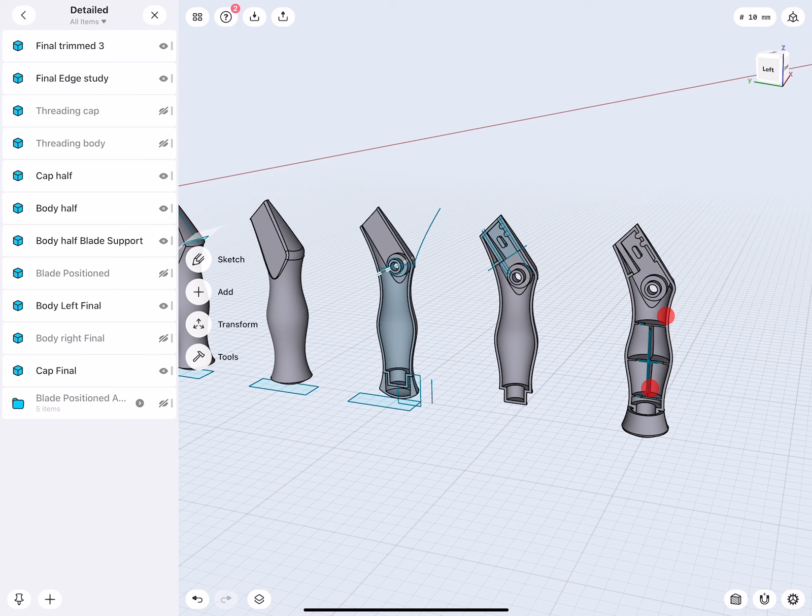So how did I actually do those support elements? First, let's say this is made out of plastic, they will help make sure that when I really apply a lot of pressure on the outer surface, it does not collapse. And in addition, it actually will help holding the knives or the blades in place. So this we can hide, select this, bring this over another 100. There we are. Cool.

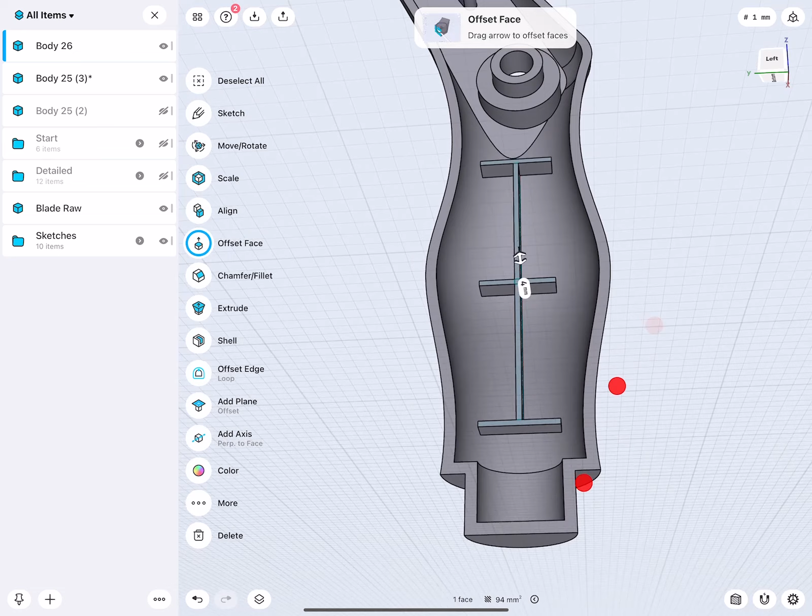So I just drew myself some very basic sketches, just boxes, 2 millimeter, very simple. Bring this in. I extrude everything together because now it's very easy to move to this view. Select this face, basically that whole system, and then select this face and say replace. Next step, join them. Very good.

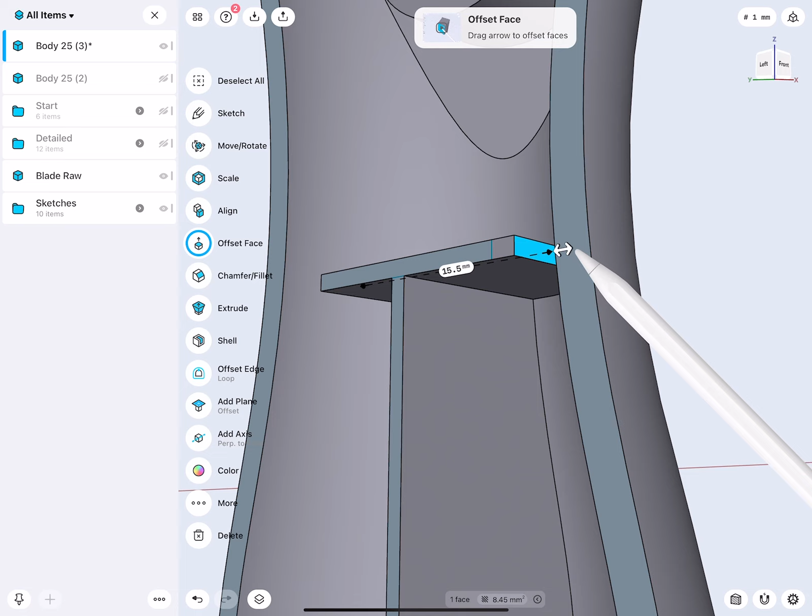And then we simply, again, move this over to close the shape. Oh, amazing. Just simple. I just wanted to say drag and drop. It's just so simplistic and it just works. And Shapr does all the rest for us. Oh, come on. There we are. Very good. Cool.

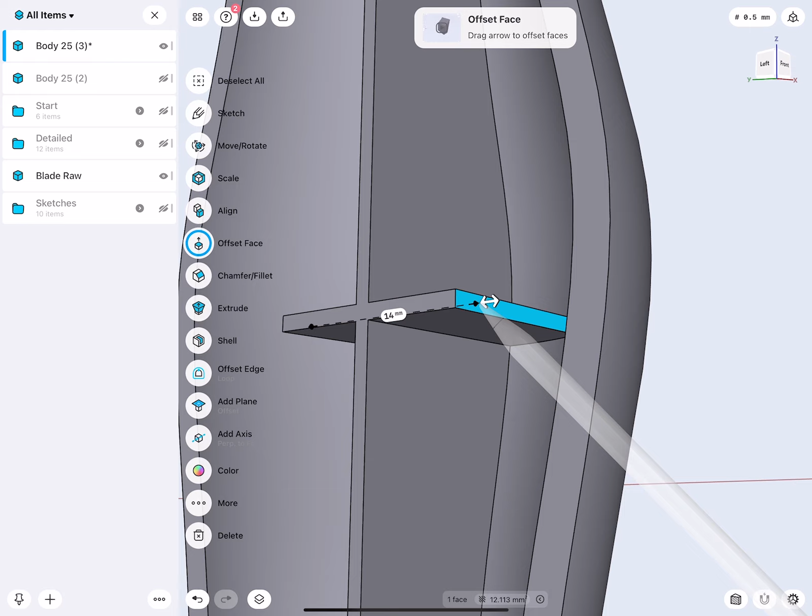If we do not want this to be perfectly flush, obviously then at this point, we want to lower this by a little bit or as desired, and then we would bring this back and sink it into the surface. But since I want blades actually to sit in there, each side needs to really be touching each other.

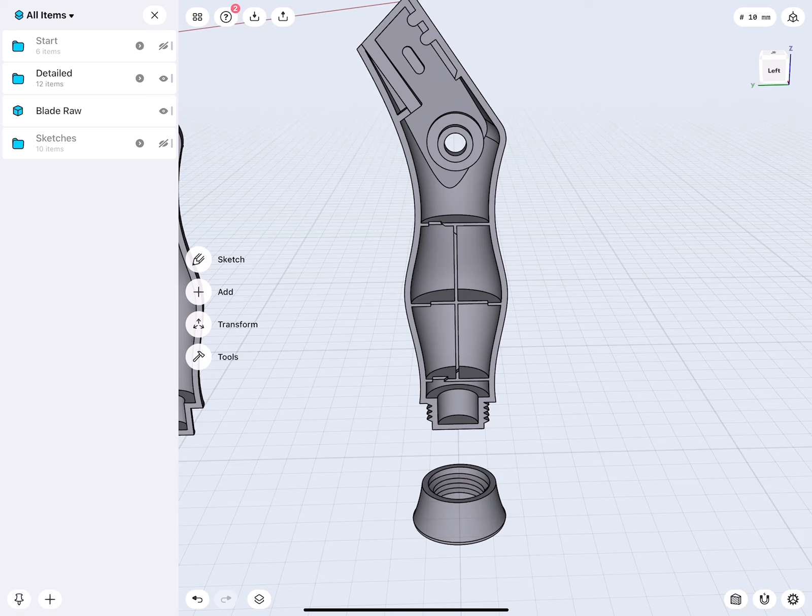Okay. This basically reaches the end of this exercise. If I move this one down, there you can see there is the threading inside the cap. There's the threading added to the lower part. And in here we have now all the blades there. The other part. Yeah. And if we move this up, there we are.

So now we have a model of something that can be 3D printed out of plastic, 3D printed out of metal, could be prototyped, and then is probably ready to be also manufactured. I hope you enjoyed this journey of seeing all the individual steps and having this narration, how I used basic sketching and then Shapr's really amazing direct modeling tools to create something actually quite complicated. And I hope that you saw if you break this down logically, it's actually pretty easy.